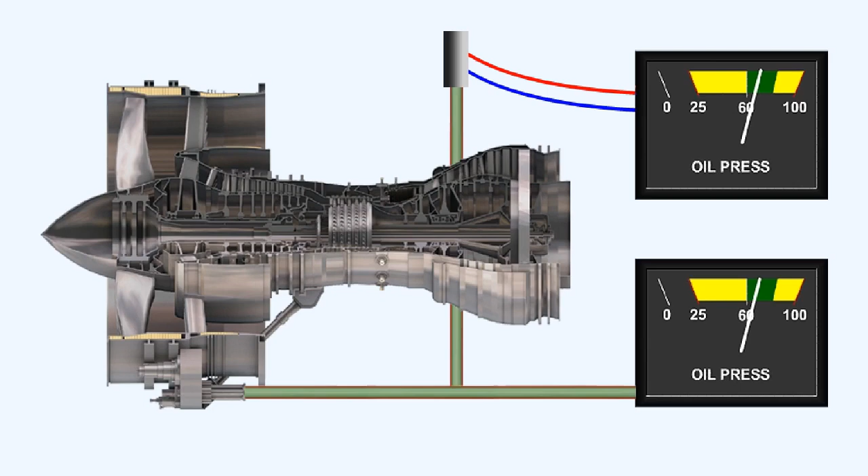A remote indicating system uses a remotely positioned sensing element, which is connected to the pressure source. The sensing element translates the actual pressure reading into an electrical signal, then sends the signal via electrical wiring from its remote position to an instrument in the cockpit.

A direct reading pressure instrument is physically connected to the source of the pressure it's sensing. For instance, a direct reading engine oil pressure gauge will be connected via an oil pressure pipeline directly to the engine, to the point where the oil pressure is to be measured.

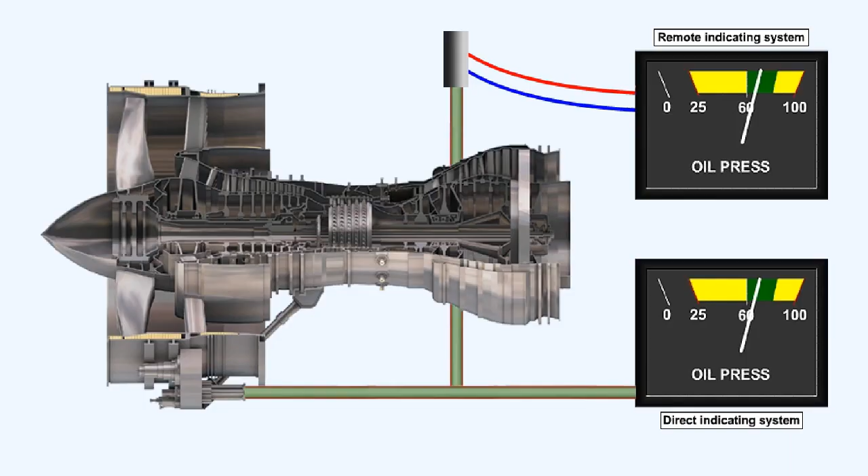Coloured arcs of green, amber or red are used to indicate the range and limits of the pressure system.

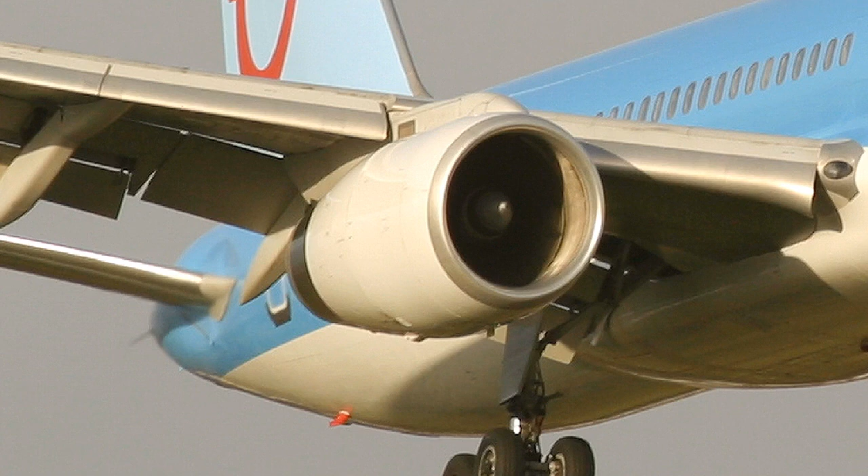Vibration monitoring equipment is fitted to almost all commercial jet engine aircraft. Although gas turbine engines have an extremely low vibration level, any change in that level is usually indicative of damage which may lead to failure.

Warnings will be given in the cockpit if the vibration levels are exceeded, and some systems have a continuous readout of vibration levels. Modern engines have the facility whereby the vibration level of each rotating assembly can be monitored, so that the source of any vibration can be pinpointed.

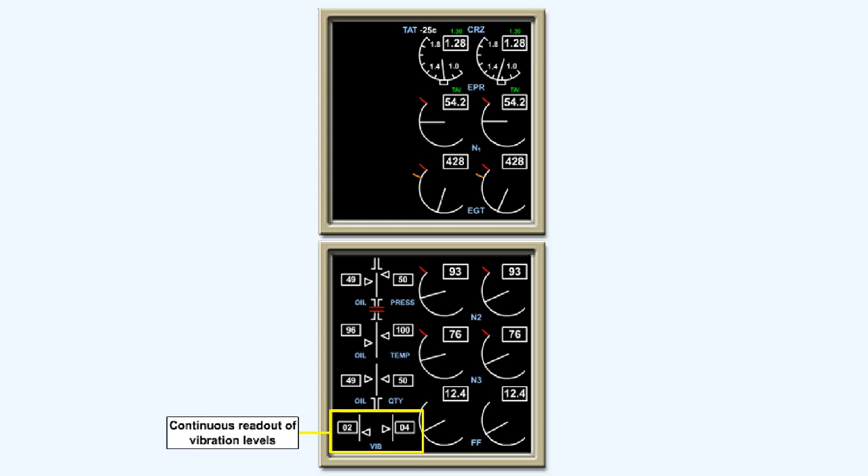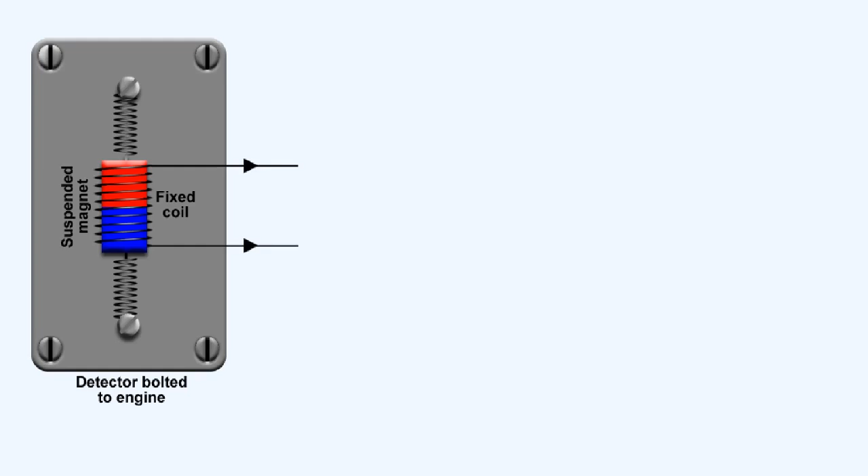The principle upon which vibration monitoring equipment works requires an input from a detector, which can be either a piezoelectrical crystal mounted strategically on the engine, or a fixed coil carrying 115 volts at 400 Hz, the output of which will be affected by the movement of a magnet within it, which is mounted on springs.

In either case, the frequency of the incoming vibrations will be amplified, and then filtered so that only those frequencies that are indicative of damage occurring to the engine will affect the output.

The output of the detector will affect the current flowing through the coil into the amplifier and filter. The filter will erase any output which is normal to the engine, but allow through to the amplifier any frequency that's considered to be harmful to the engine.

The result of this amplification is sent to the instrument via the rectifier and warning circuit. The needle will show the appropriate deflection for the amount of vibration being suffered by the engine at that time. If the level of vibration exceeds a predetermined amount, a warning light on the instrument illuminates.

Vibration is measured and displayed in relative amplitude.

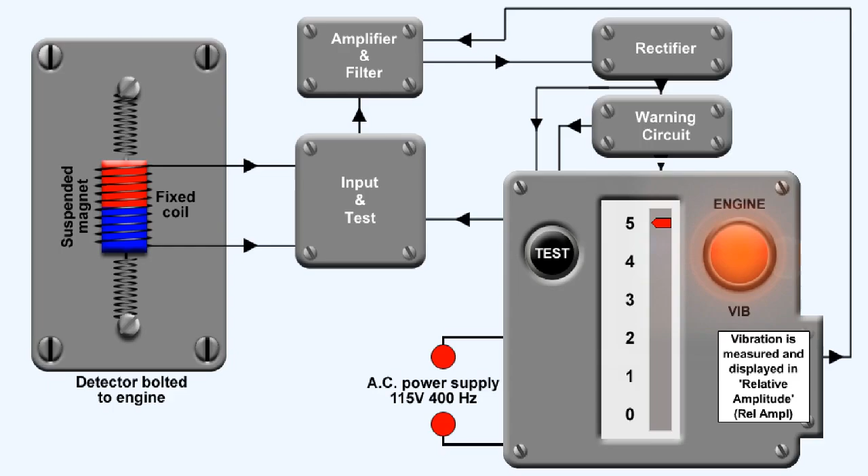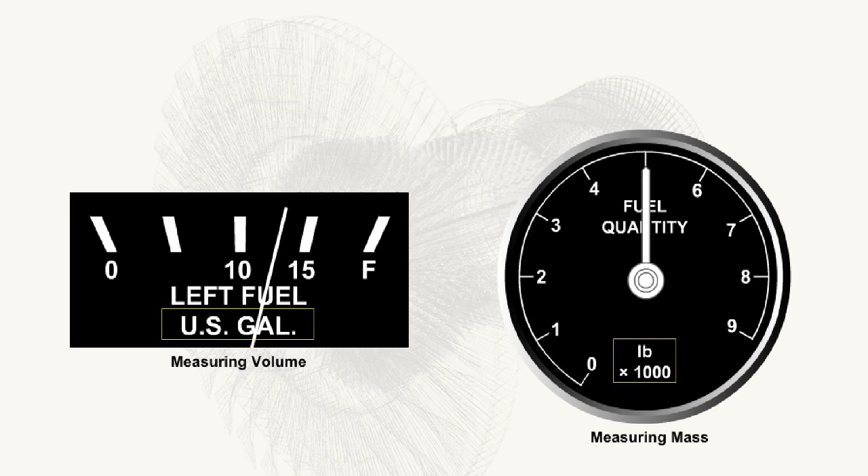There are two methods of indicating the quantity of fuel carried in an aircraft. Either the volume, for example gallons, or the mass, kilograms or pounds, are measured. Because the mass of the fuel on board is of more interest to the pilot of a large aircraft than is the volume of the fuel on board, measurement of the volume of fuel is now only used on light aircraft. The simplest form of volume indication is a float system.

Early aircraft used a float which sat on the surface of the fuel in the tank. Attached to the float was a piece of wire that protruded out of the top of the fuel tank. As the fuel level reduced, so the wire disappeared from view.

A later system used the float to reposition a wiper on a variable resistor. This varied the current flowing to an indicator which had a pointer that moved over a scale calibrated in volume. The system was powered by direct current.

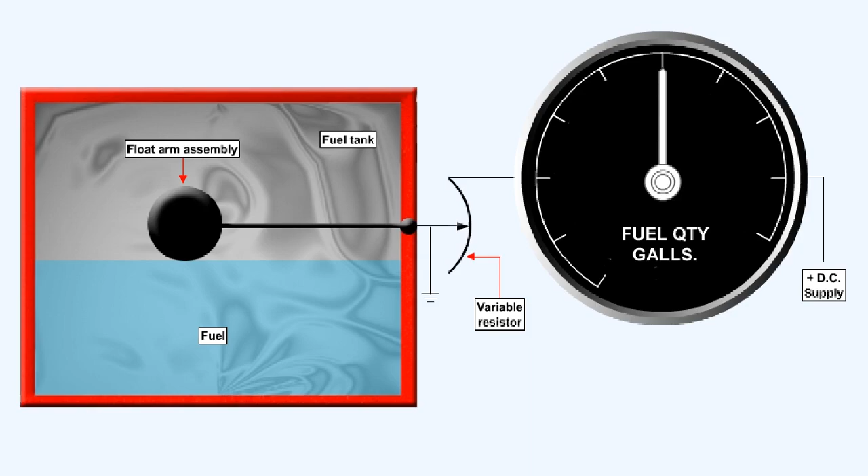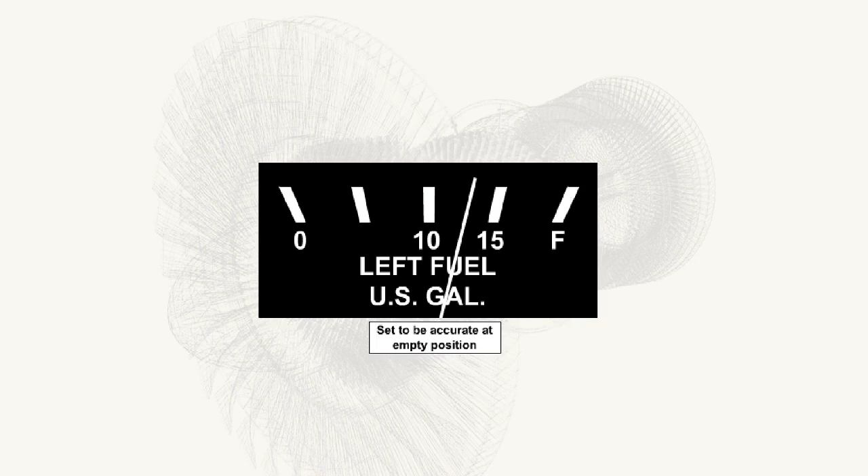The disadvantage of the float system is that the indication is not linear, and there is no provision for making adjustments for system accuracy. The gauge is set to be accurate at the low and empty positions. The system is also subject to errors caused by temperature changes, aircraft attitude changes, and aircraft acceleration.

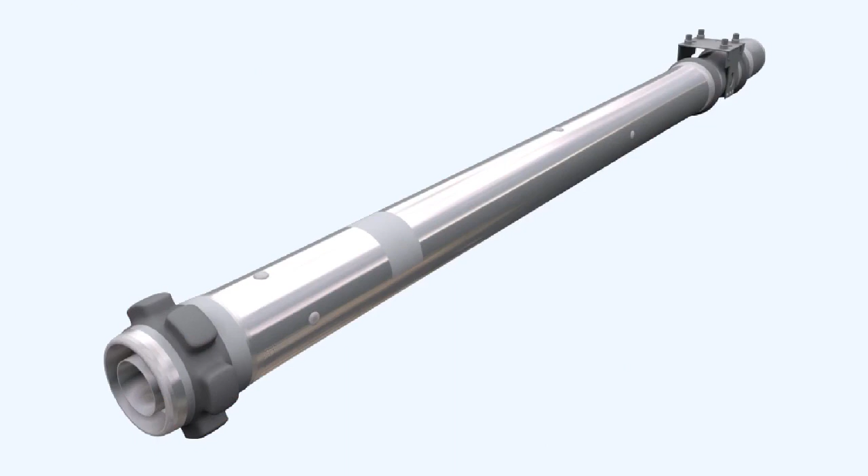In its basic form, a capacitance system, which is much more accurate than the float system, consists of a tank unit, which is effectively a variable capacitor, located in the fuel tank, together with an amplifier and an indicator.

A tank unit consists of two concentric aluminium alloy tubes which are held apart by pairs of insulating pins. The coaxial electrical connections are insulated and the unit is insulated from the tank.

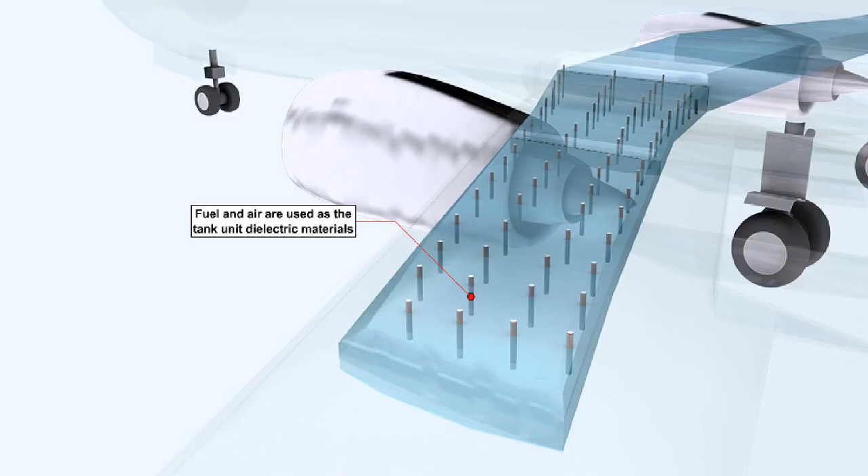The principle of operation of the capacitance system is based on the use of fuel and air as the dielectric between parallel plate capacitors, which have a fixed area and a fixed distance between them. The only variable in the system is then the ratio of the dielectrics used, which are fuel and air. That ratio is determined by the quantity of fuel in the tank.

Incorporated in the system are reference units, which reduce indication errors that would occur if the dielectric constant of the fuel changes from its normal value, which is about twice that of air, and directly proportional to its density.

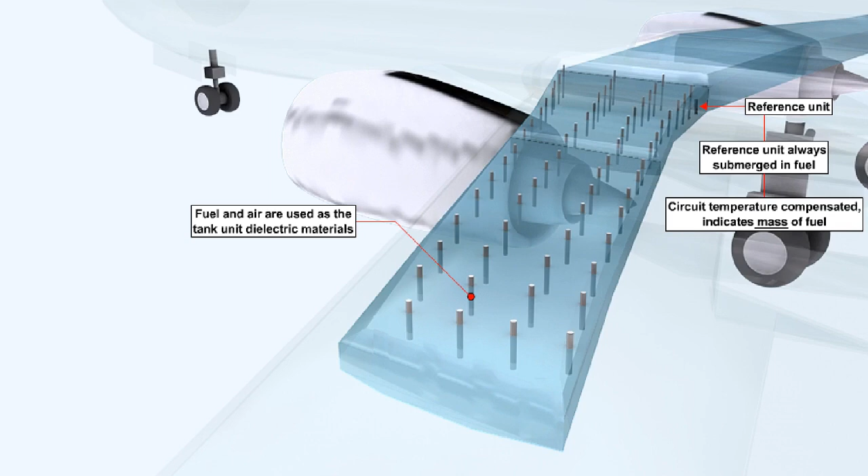Reference units are located on the lower end of a tank unit, and are always totally submerged in the unusable fuel that remains in the tank. The circuit is compensated for changes in temperature, and will indicate the mass of the fuel in the tanks.

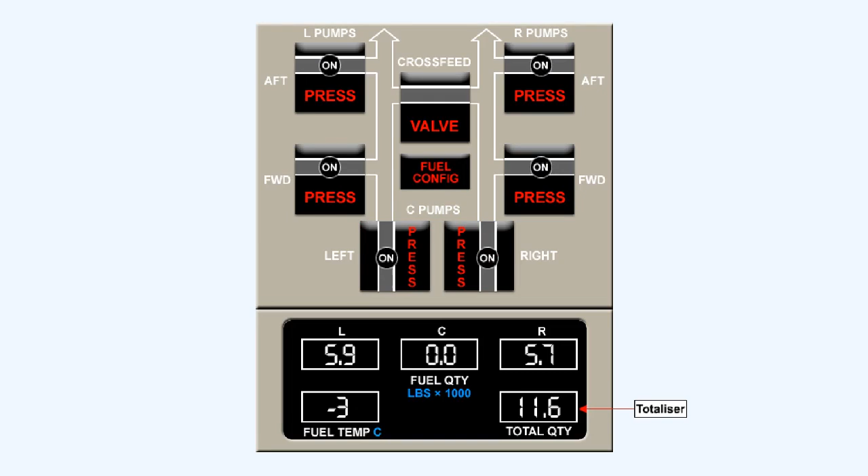Fuel gauging systems can incorporate an additional indicator known as the fuel totalizer, which can indicate the sum of all of the tank quantities.

In the event of a gauge failure, the fuel gauging system will fail safe and drive the needle of the failed indicator slowly to the 0 position.

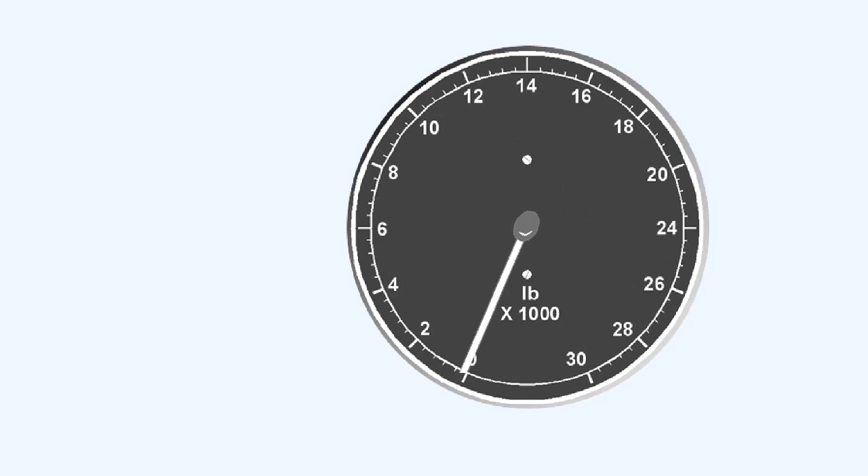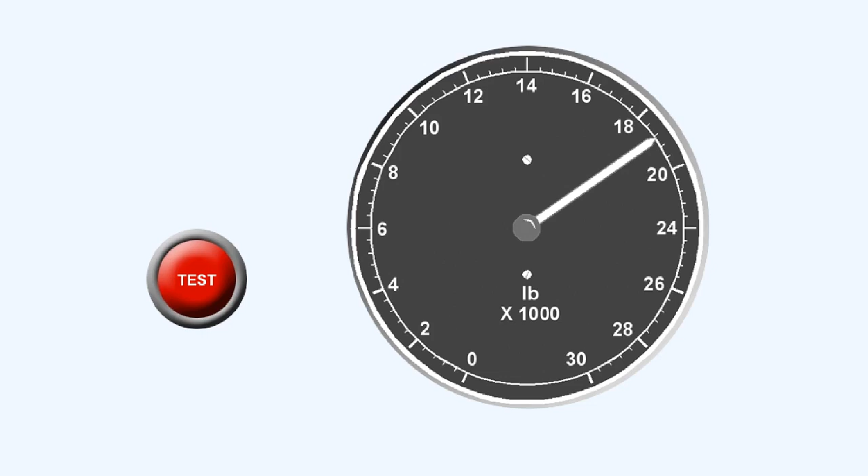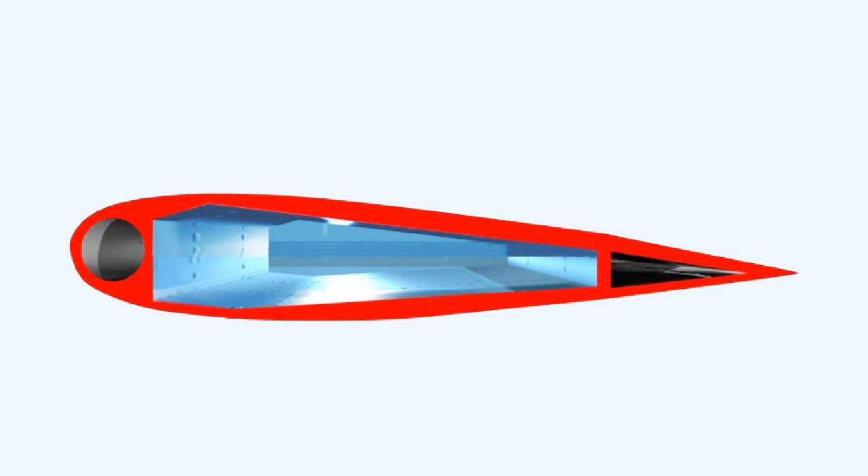If water is present in the fuel, it can cause errors in the indicating system. If the percentage of water is very large, the capacitors in the sensing units can be effectively shorted out. If this happens, the indicator needle will be driven beyond full scale.

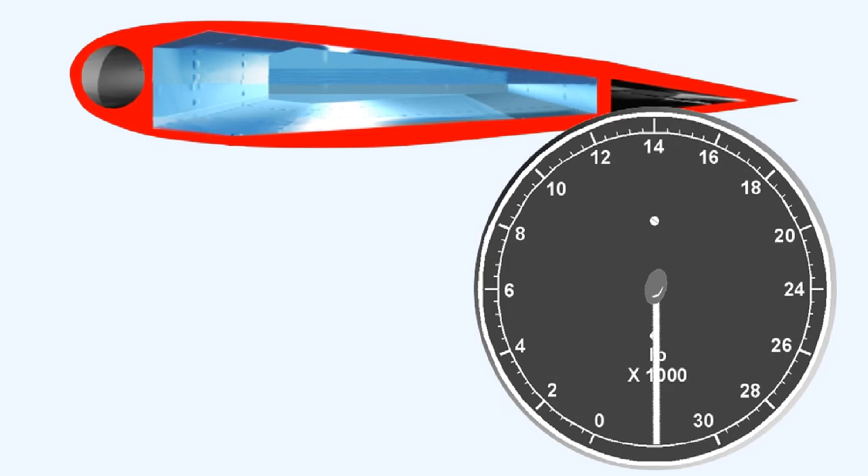As well as the quantity of fuel measured, the instantaneous fuel flow can be shown. To obtain the indication of total fuel used, the instantaneous fuel flow must be integrated.

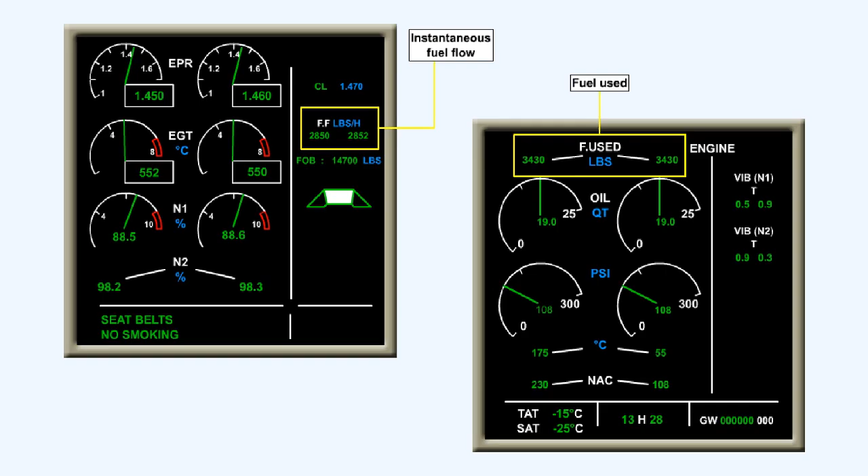The fuel flow meter can display either volume flow or mass flow. To indicate mass flow, the meter must be compensated for the density of the fuel.

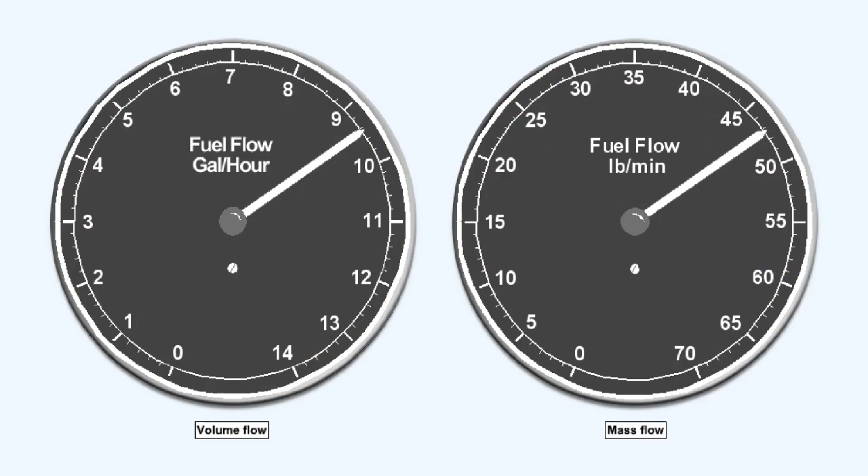A fuel pressure gauge can be adapted to be used as a simple flow meter. This system is used on many light piston engine injection systems.

Most gas turbine engines use an electrical sensor, which utilizes the change in either the torque output or the rotational speed of an impeller situated in the high-pressure fuel line to the fuel spray nozzles.

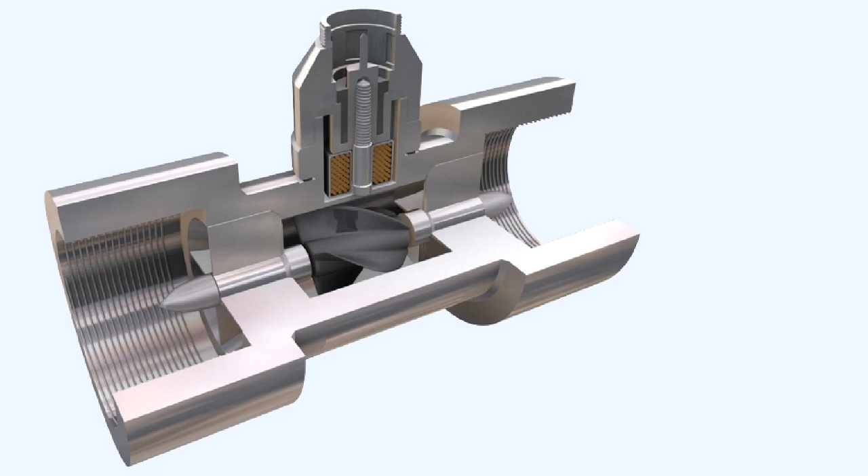This type of fuel flow meter consists of a cylindrical light alloy casting, within which are guide vanes that support the shaft of a helical vane impeller.

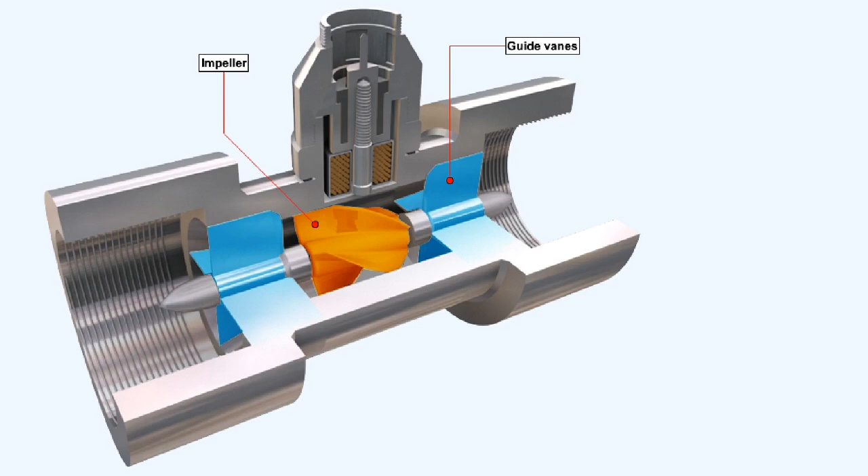The impeller has a magnet embedded in it. Electrical pick-off coils are situated in the wall of the cylinder casting.

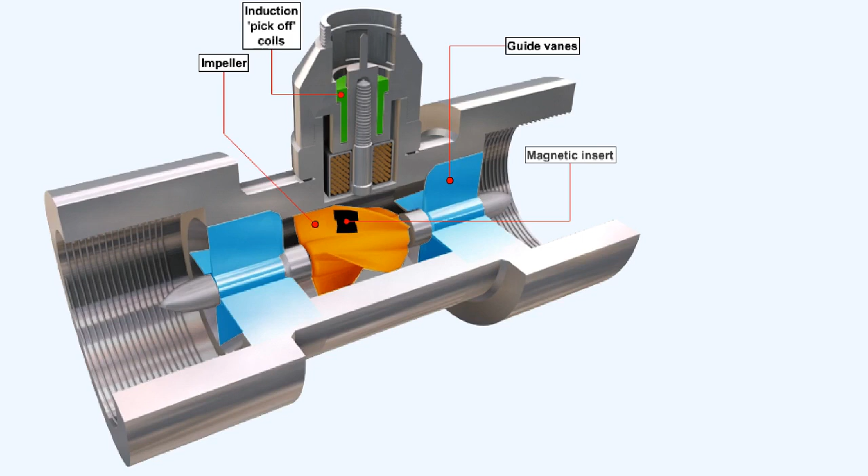When the fuel flow rotates the impeller, a sinusoidal signal is induced in the pick-off coils. The frequency of the sinusoidal signal is proportional to the speed of the rotor, which in turn is proportional to the rate of flow.

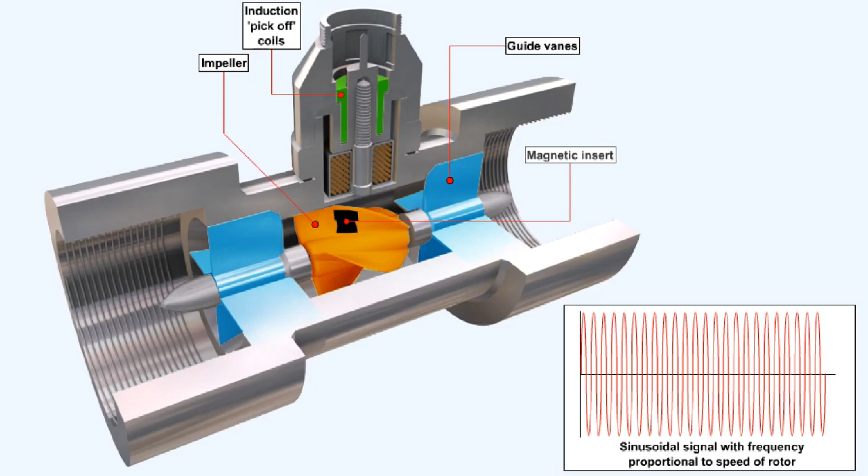The total consumption is obtained by integrating the rate of fuel consumption over time. A flow meter that displays fuel consumed as well as fuel flow is called an integrated flow meter.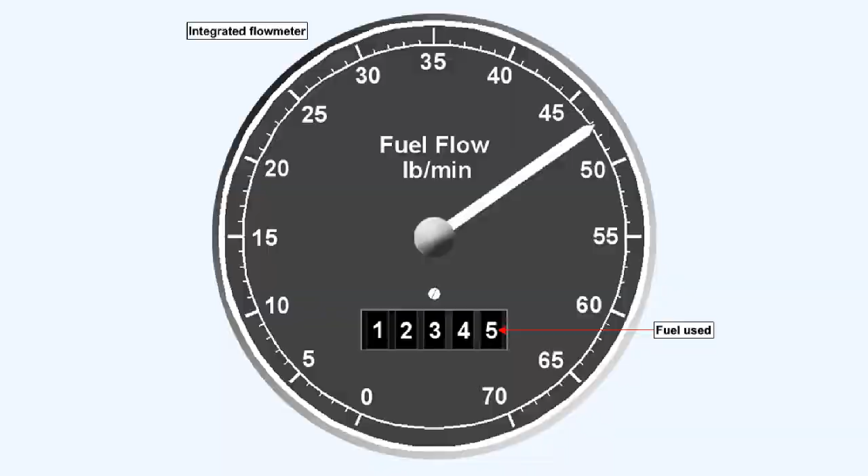Modern aircraft employ remote indicating systems that can be powered by either direct current or alternating current supplies. Whatever the power source, each data transmission system employs a remotely positioned transmitter located at the source of the information, and a receiver which responds to the information received.

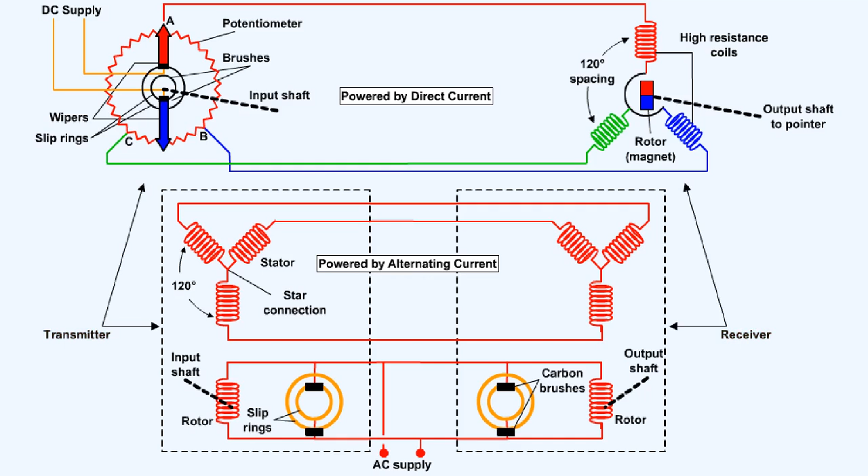The Desynn transmission system is a simple transmission system with low torque characteristics, which is used for the remote indication of angular position. It's often used where a simple pointer and scale is adequate, for example, remote indication of flap, rudder and elevator positions, or to repeat the reading of an instrument at a remote point.

The accuracy of the system is approximately plus or minus 2%.

The transmitter consists of a continuous resistance ring or potentiometer which has three fixed tappings, A, B and C, spaced 120 degrees apart, which are connected to the receiver.

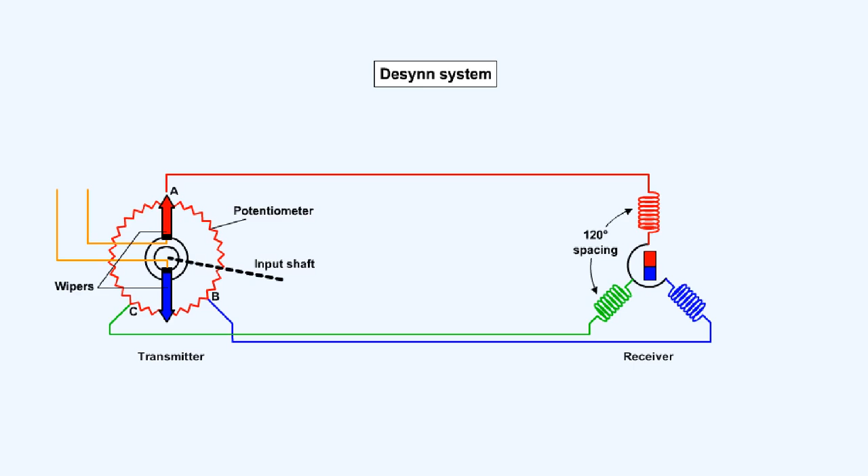The input shaft carries two diametrically opposed spring-loaded sliding contacts, or wipers, which are in contact with the potentiometer. The wipers are fed via slip rings and brushes with direct current.

The receiver consists of three high-resistance coils, whose axes are spaced 120 degrees apart, with a permanent magnet rotor pivoted at their center carrying a pointer shaft. The three coils are connected to the tapping points A, B and C in the transmitter.

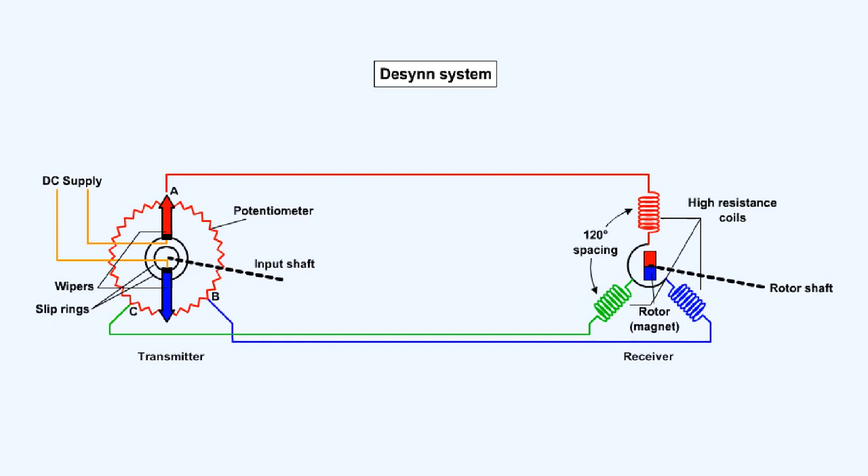When direct current is applied to the transmitter wipers, the voltages at the tapping points A, B and C produce a current flow in the three stators of the receiver, and a resultant magnetic field is produced.

The rotor magnet aligns itself with this magnetic field.

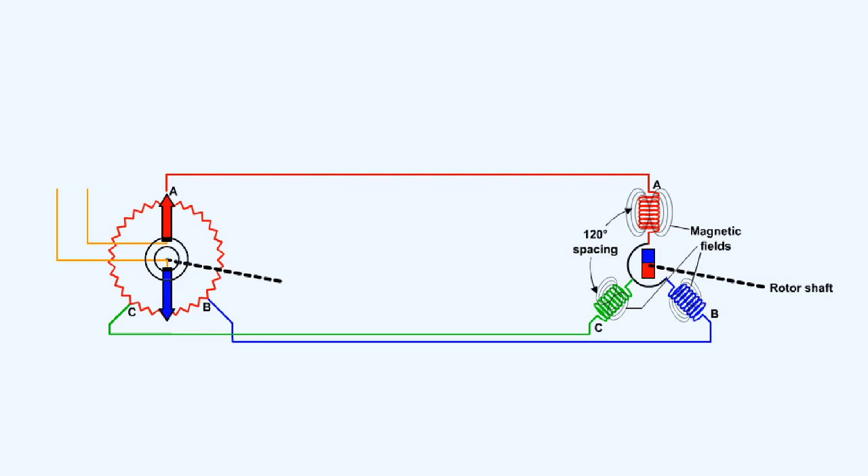The magnitude and polarity of each tapping point voltage varies according to the position of the wipers, and thus, if the input shaft is rotated, the change of voltages at A, B and C produces a variation in the current flowing in the stator coils, and rotation of the resultant magnetic field in sympathy with the rotation of the input shaft.

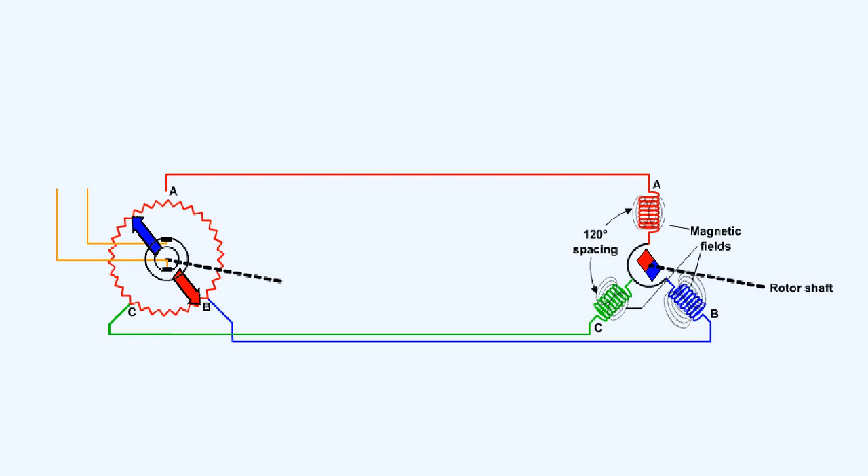The rotor magnet remains aligned with this field at all times, and so rotates in synchronism with the input shaft.

Here the voltage distribution around the potentiometer is such that point A is at plus 24 volts, while points B and C are both at plus 8 volts.

Because the voltage at A differs from that at B and C by the same amount, current flows from A through coil A in the receiver, then divides equally at the star point, with half the total current flowing through coil B and half through coil C back to the transmitter.

The resultant magnetic field in the receiver, with which the rotor magnet aligns itself, is compounded from the vectors representing the individual fields.

If the input shaft is rotated through 120 degrees in a clockwise direction, as shown here, the voltage distribution around the potentiometer is such that the current flows from B through coil B in the receiver, then divides equally to flow through coils A and C back to the transmitter.

The vectors show that the resultant magnetic field also rotates through 120 degrees clockwise, and the rotor shaft aligns itself along this new axis.

Thus, if the wipers in the transmitter are placed in any position by the input shaft, the resultant field at the receiver, and hence the rotor magnet, takes up a corresponding position.

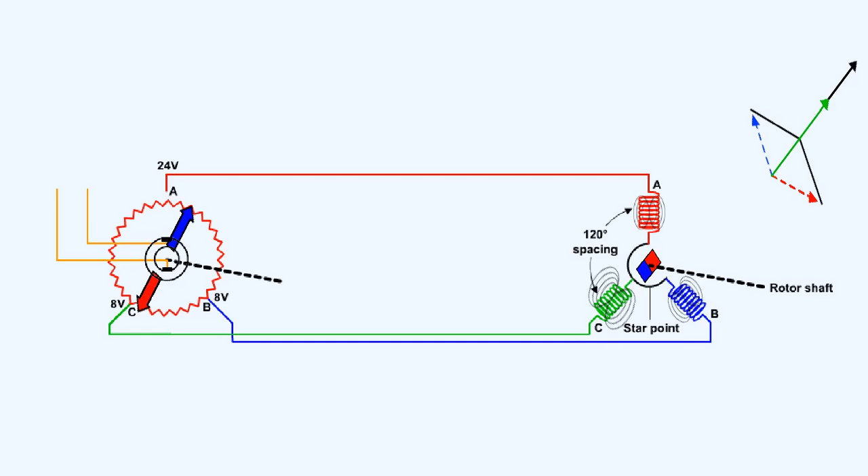If a pointer moving over a calibrated scale is attached to the rotor, remote indication of the position of the input shaft is immediately available.

The Desynn system has inherent errors caused by the wiper arm being in physical contact with the potentiometer. This causes inaccuracies due to friction and carbon contamination of the resistor.

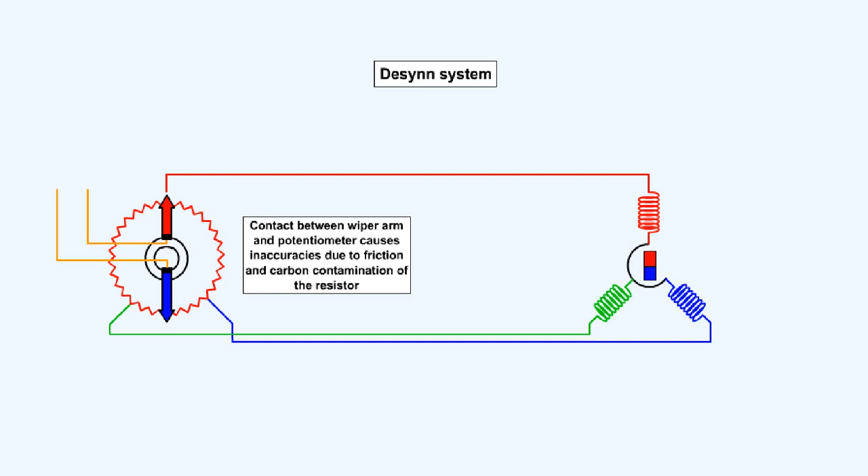The Selsyn was developed in 1925. Halfway through the Second World War, the Americans reinvented the Selsyn and called it the Synchro.

The Selsyn is a system whereby a transmitter and a receiver, powered by alternating current, are electrically connected so that angular rotation of the rotor in the transmitter is reproduced simultaneously in the receiver.

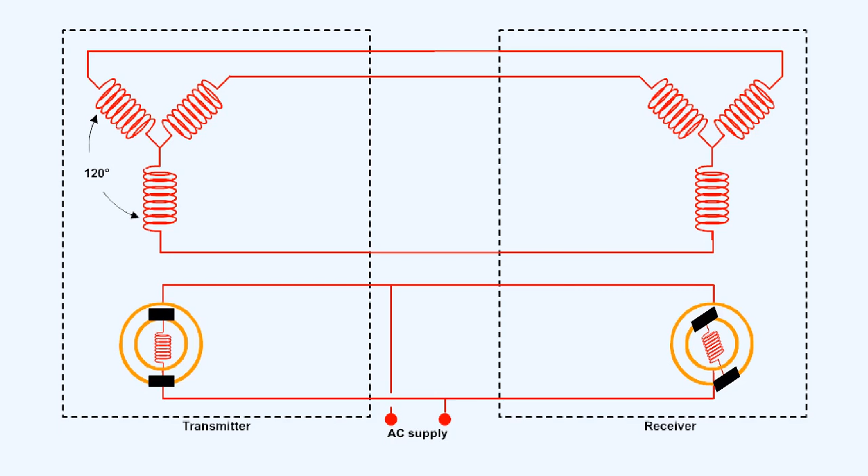The transmitter consists of a stator and a rotor. The stator has three electrical coils whose axes are 120 degrees apart. The three stator coils are star-connected.

The rotor is mounted on a shaft and has one electrical winding, the two ends of which terminate in two slip rings. Carbon brushes feed power to the rotor through the two slip rings.

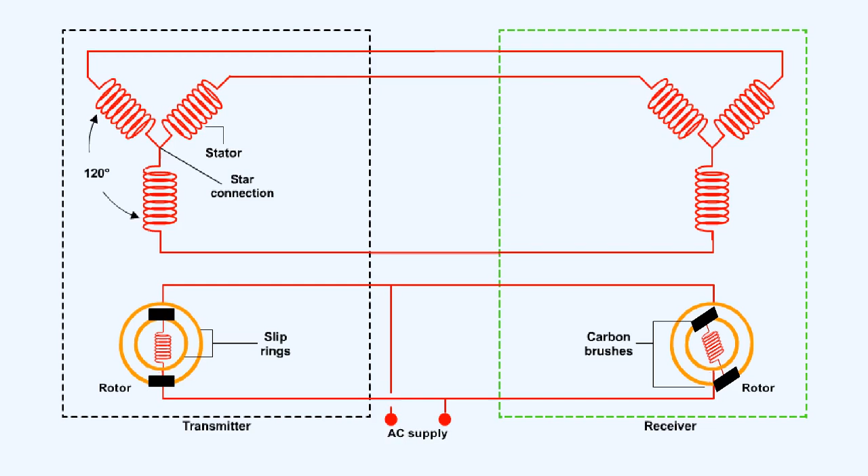The receiver is identical to the transmitter, and they are connected electrically to each other as shown here. The two rotors are supplied by alternating current from the same source. With power applied, both of the rotors will adopt the same position relative to their stators.

The rotor of the transmitter can be attached to the output shaft of any device which needs positional information communicating to a remote position.

The magnetic flux generated in the coil of the rotor interacts with the cores of the stator and causes a current to flow in their windings.

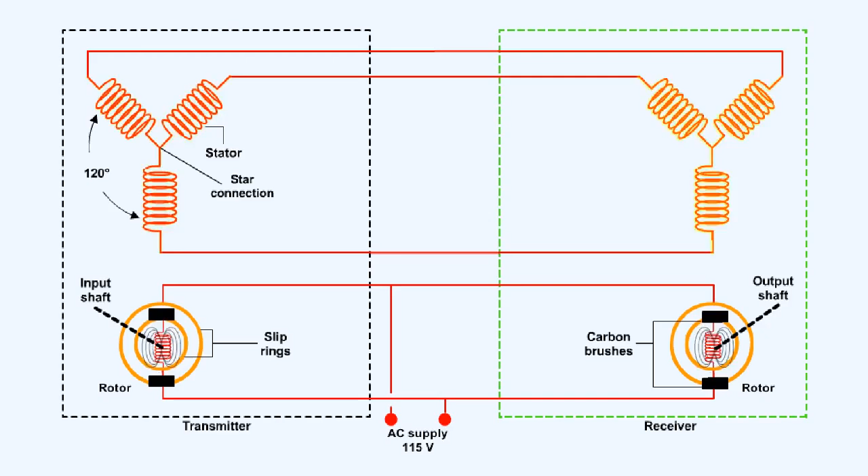Because the stator coils of the transmitter and receiver are in series with each other, the stator coils of the receiver now have a magnetic field around them which is identical to that around the stator coils in the transmitter.

The rotor in the receiver aligns itself with the magnetic field which is formed in the receiver stator, adopting a position which is identical to that of the transmitter rotor.

The synchro system is more accurate than the Desynn system.